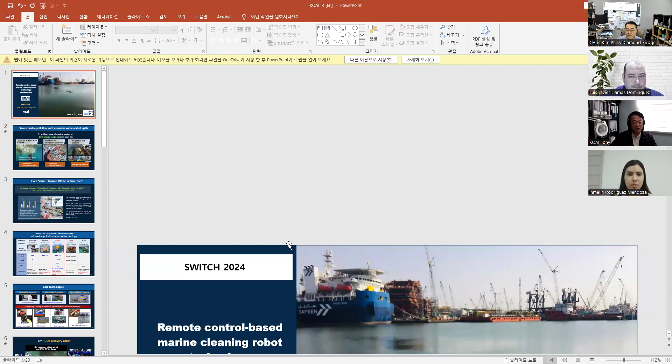KOAI is a manufacturer of marine pollutant recovery robots, and we concentrate research, development and marketing on KOBOT. KOBOT is a remote-control-based marine cleaning robot. Everybody knows there are two types of pollutants in the ocean: floating plastic waste, which is a huge amount of floating plastic in the ocean, and the other is spilled oil.

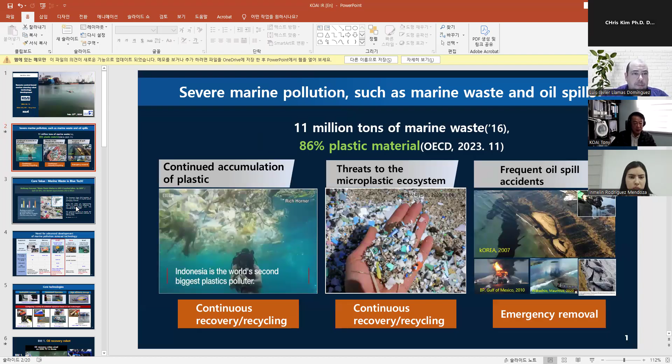My English speaking skill is very poor, please understand.

McKinsey estimated the waste plastic market at US$600 billion by 2050, and the spilled oil market at $6 billion.

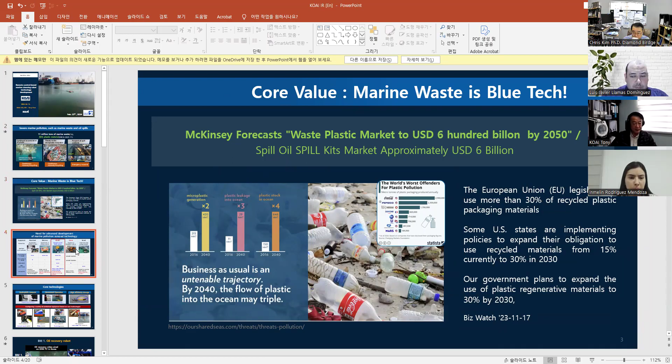Currently used pollutant recovery systems include absorbent oil skimmers, and some companies use drones and recovery vessels. Our KOBOT uses a hydrophilic ratchet robotic vacuum system, which can cover from low viscosity to high viscosity spilled oil, even microplastics.

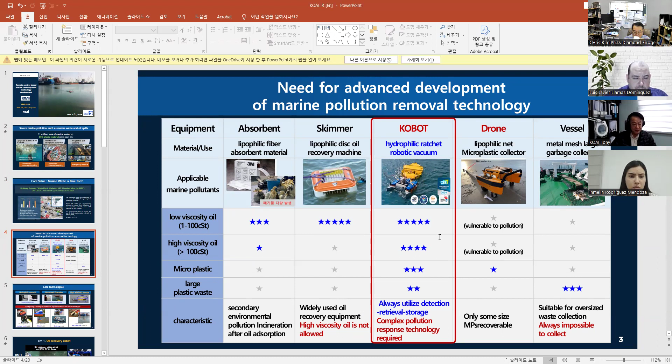We use three main technologies. One is hydrophilic material technology, which we use to collect spilled oil and even microplastics at the same time.

We also have unmanned operation technology. From the operating position to a 1 kilometer area, our KOBOT can operate to recover spilled pollutants.

Question: Is it the same machine that recollects both liquids and solids? Answer: Of course, from low viscosity to high viscosity, we can collect.

On the next page I will show you the videos — light oil and heavy oil. You can see the testing video on the next page.

We use a floating efficiency storage tank. At the bottom of this storage tank there is a nano filter that collects mixed oil and water, separates them, and the separated water is returned back to the ocean. This is the main technology of KOBOT.

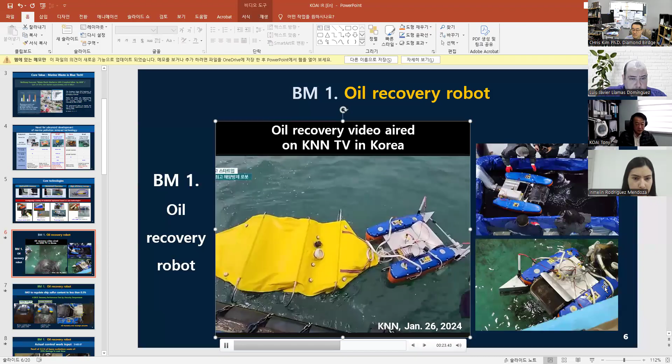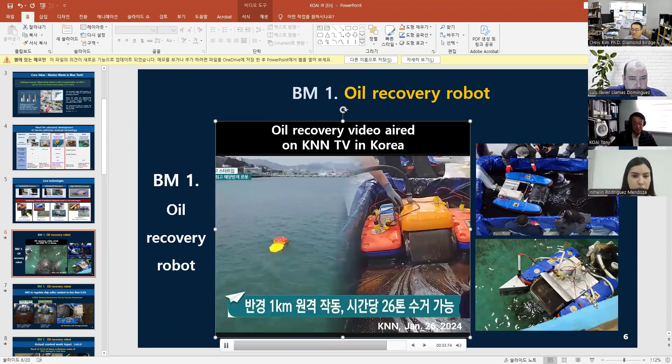Question: What capacity does the tank have? Answer: This capacity is 0.7 tons. This yellow part can easily be taken out after pouring inside the storage tank, and easily changed to an empty storage tank.

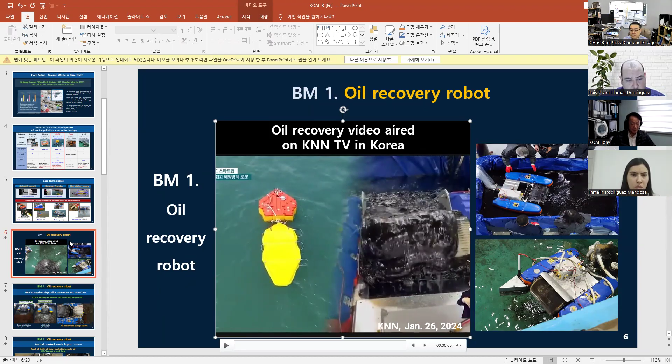We used LSFO oil for this test, shown in this video, so people could see it — it's very heavy oil. The hydrophilic disc drum turns and collects in front of the spilled oil, then passes it through the storage tank. This is the solid condition after the LSFO spill.

Question: Does the viscosity stop or slow the velocity of the recollection, right?

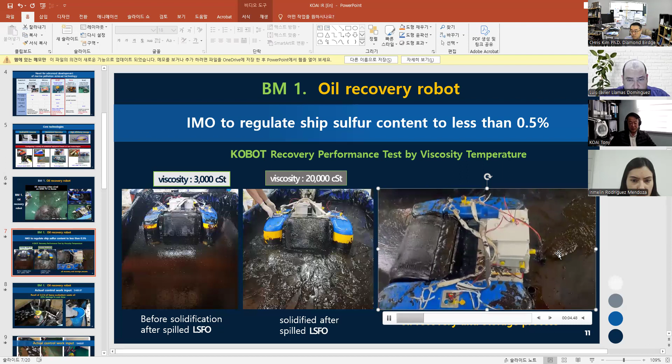This video shows how we can collect the spilled oil. If the storage is connected on the right side, all of the moving LSFO can be collected.

This video shows an oil spill accident — 3.5 tons happened at Kamcheon port of Busan. This is the actual situation. After that, with our KOBOT, we collected 3.5 tons of heavy spilled oil.

After collecting, we can separate it in the yellow storage tank. This is the collected heavy oil. The left video shows before, and this shows after work and before work.

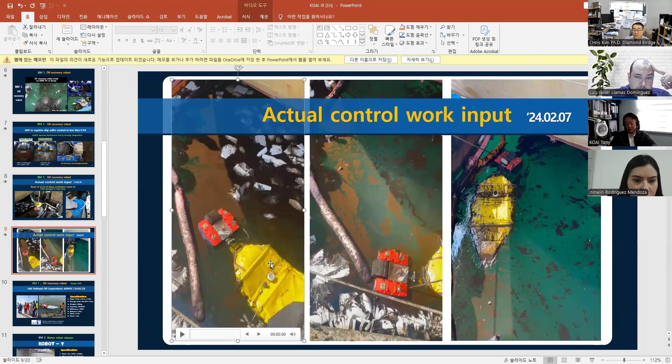This is one of our models, the oil recovery robot model. We got a global POC at UAE National Oil Corporation, ADNOC, two times. In February 2024, we conducted a test at the ADNOC site. He is the vice president of ADNOC. It was a successful demonstration at the time.

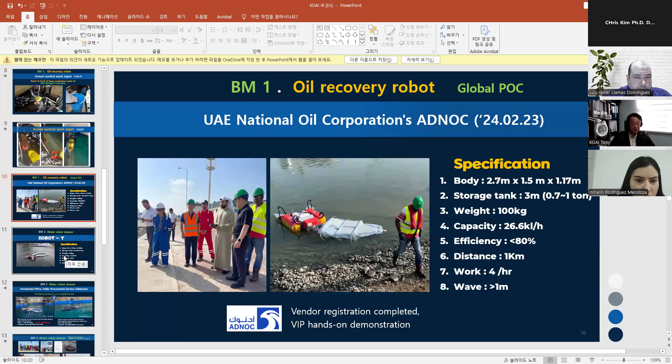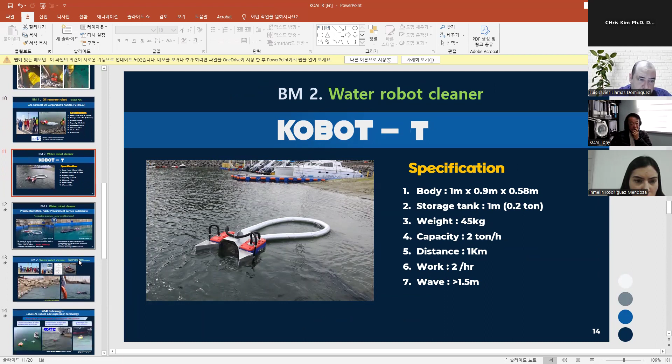The other model is the water robot cleaner, which easily collects floating waste with our KOBOT system. This water robot cleaner has quite a lot of certification from our government. This is a test showing how we can collect solid waste.

We can customize the backside storage tank — there's an open type and a covered net type.

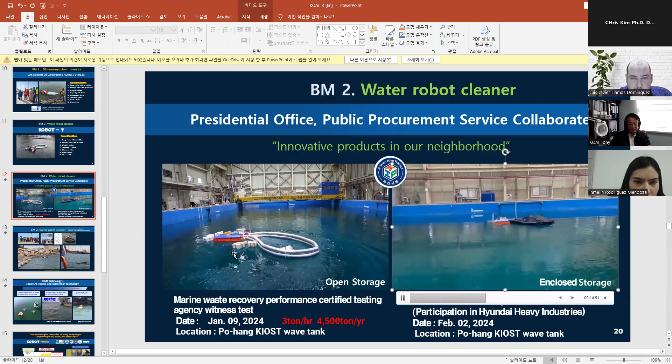With this water robot cleaner, we got a global POC at ADNOC, the second demonstration at that time. From the outside, there are two orange boxes.

Question: Those were only demonstrations, but do you have real cases or scenarios where you have deployed your solution?

This is not the real situation, because it's very difficult to create a pollutant situation in a clean ocean, so we pass two orange boxes into the ocean and collect with our KOBOT.

An oil spill accident happened in Korea several times; in that case, there is a real situation. But KOBOT-T is for catching garbage in the ocean, which everybody can use. Only the oil spill case is the actual accident we can show again.

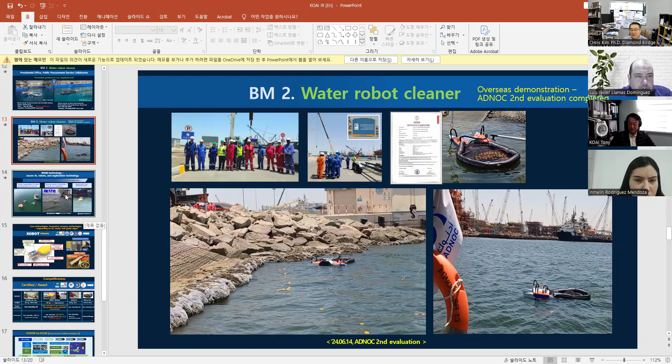This is our cluster system — not only one device, but two or three KOBOTs working together for recovery work. This is our research system.

This test is a very harsh condition. It's quite a high wave condition, and our KOBOT is operating well.

In fact, one is reconnaissance - when there is no policeman, or when you want to watch or check other ships, in that case reconnaissance is done by the KOBOT with a camera.

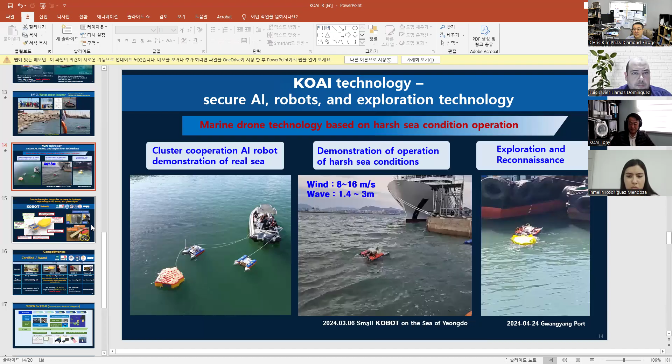As you can see, there are lots of certifications we already have - new technology, innovative product, and good invention recognitions from our government. We supply our KOBOT to quite different types of government companies, and export to other countries. Our technology is protected by 2 USA patents and 8 Korean patents.

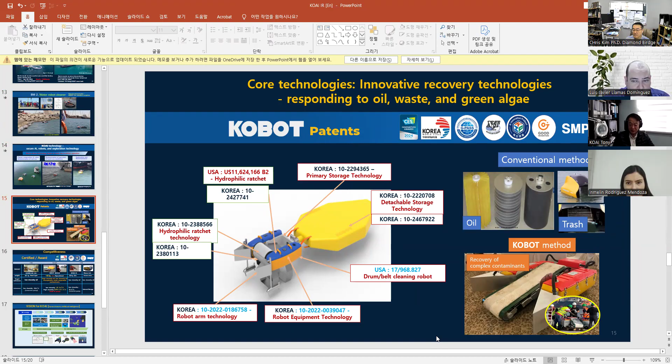This is our competitiveness. Other equipment is only effective against limited contaminants, but our KOBOT is quite lightweight and handles low viscosity to high viscosity, even microplastics - we can collect them all at the same time. Low viscosity oil, we can collect 26 tons per hour; high viscosity oil, 21 tons per hour.

This is based on data research - we have certification of this capacity.

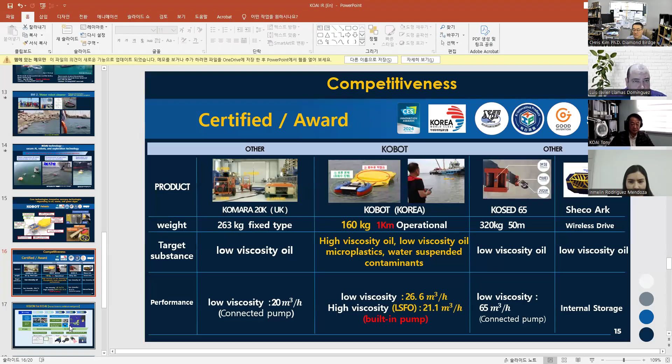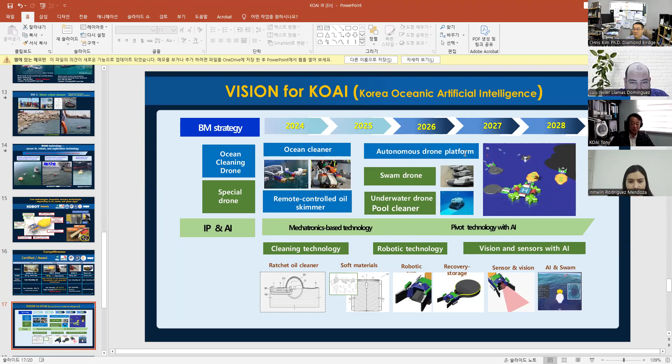We currently have 2 types of cleaning models: oil recovery robot and trash recovery robot. Now we are extending our business to swarm drones, underwater drone pool cleaners, and an autonomous drone response system. It's like these pictures.

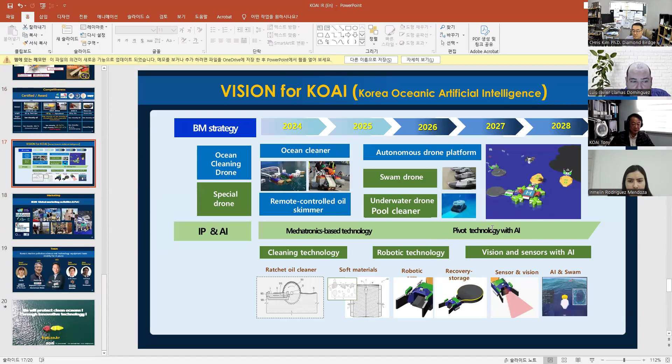Those are only concepts, right? Yes, this is a concept, and we are now researching and drawing up these systems. Looks nice.

Our company started business in 2017 - just 7 years ago. We work, research, and develop our equipment, with many overseas exhibitions, global POC, and sales for other countries.

I am CEO Tony Bob, and our engineer Ho Shin Lee, and center head researcher Lia Ju. This is a very special team of joint researchers - Mr. Moon is a principal researcher, very famous, from a strong Korean government institute, and Mr. Park is a professor at Seoul National University.

Okay, this is all I have. But Tony, you can show them the video - the Gamcheon port video, the actual footage of how this works.

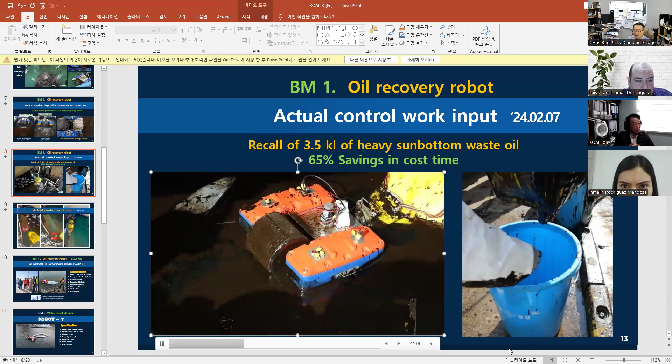I don't know how long it took? How long did it take? They just called early in the morning, at 6 a.m., and it moved from our factory to the spilled oil port. Starting from 8 a.m., we worked just 2 hours and collected all of the spilled oil.

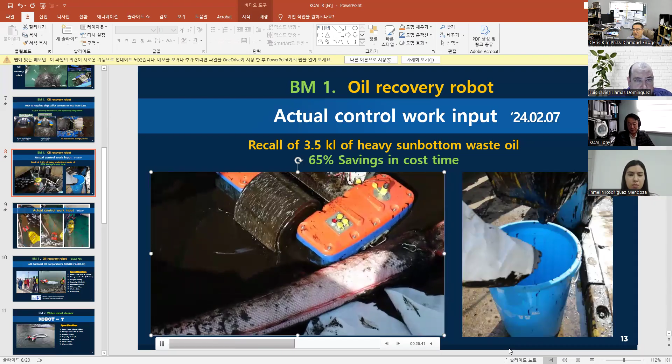This was big news because there is a fish market nearby the seaport. When they had the accident, they put up a fence and called KOAI.

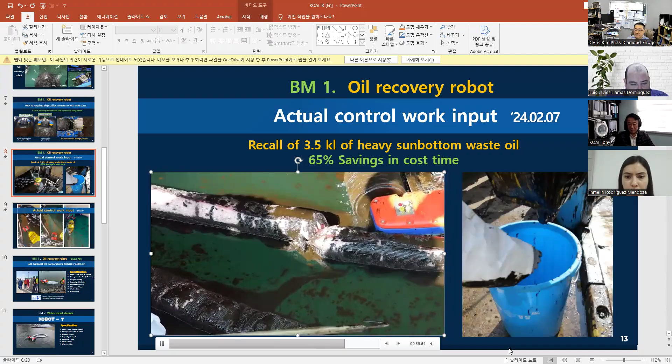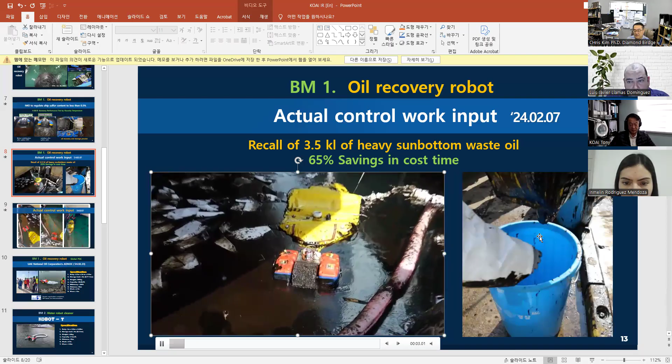Tony, you can show them how to dump the water into the basket. Okay, you can see this one - after this work is the after-collection. It's easy to separate using only the yellow strainer tank, hung using a crane. At the bottom there is water, and then...

So there's a little bit of water at the beginning. Yes, in the beginning there is a little water. Look at this - at the bottom it's water, isn't it?

The mixed oil and water is put into the storage tank. After that, by density, the oil is positioned upside and the water is downside - since water is heavier, the downside water returns back to the ocean.

A little bit of water remains that comes out. Water goes out to the ocean, but a little bit of water is between the material from the oil and the bottom outlet - in that case, some water is contained.

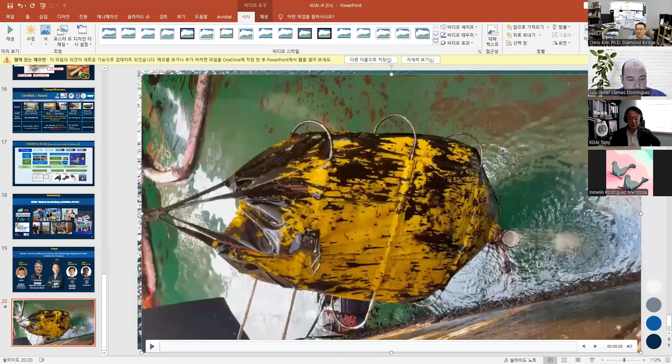Okay, so they are removable. Yes, removable. Like a car battery, like a car, you can change it. Yeah, exactly.

Excellent. What is the useful lifespan of the batteries? Maybe if you use it like a car, maybe around 2 to 3 years, we don't know, depending on the situation. Are those lithium batteries, or what kind of batteries do you use?

You can see this video.

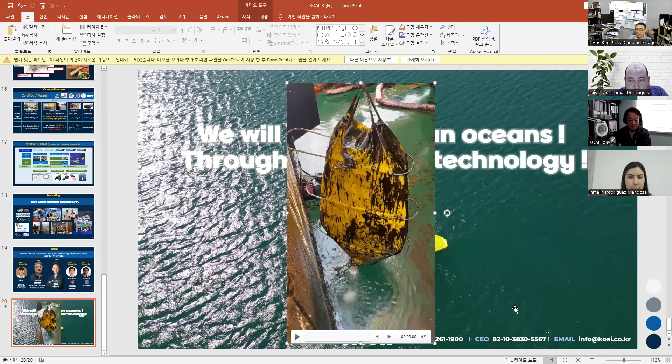This is a nano filter. Only water comes out.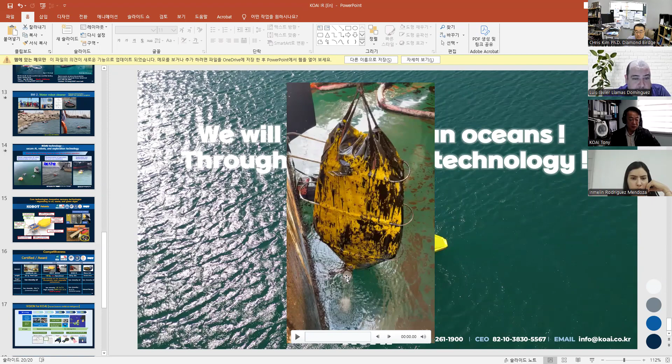We hang this on the storage tank. The water inside comes out, and after that moves to this storage tank. This easily controls the collected oil inside.

That's amazing. We are really interested in your product. We really want to jump into talking about costs.

So do you have an area where you use this one, or for application in oil spill response? You have an oil spill application area for your business, for your job? The oil spill response is one of your jobs.

We do have some services for vessels, for ships - maintenance on ships, installation of security cameras, and a lot of services for cranes, on the ships. So we want to expand our catalog of services.

I see, the cost of this one, you see the Cobot T. The reason we cannot use the camera from a security point of view is that it's customized. If you need the camera on the Cobot, yes, you can use that one, but that depends on request.